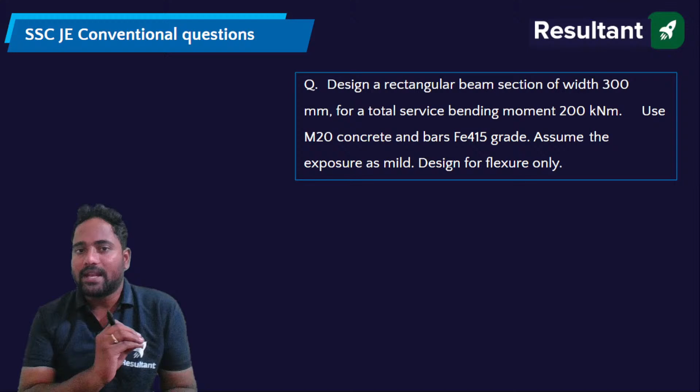The first question is: design a rectangular beam section of width 300 mm for a total service bending moment of 200 kilonewton meter, using M20 concrete, Fe415 steel. Assume the exposure as mild. Design for flexure only - flexure means you are going to design only for flexural reinforcement, you will not be designing anything for shear reinforcement here. So what is the width of the beam given to you? Width of the beam given to you is 300 mm.

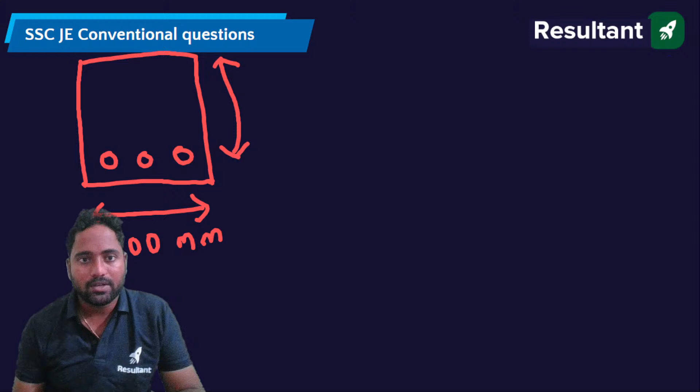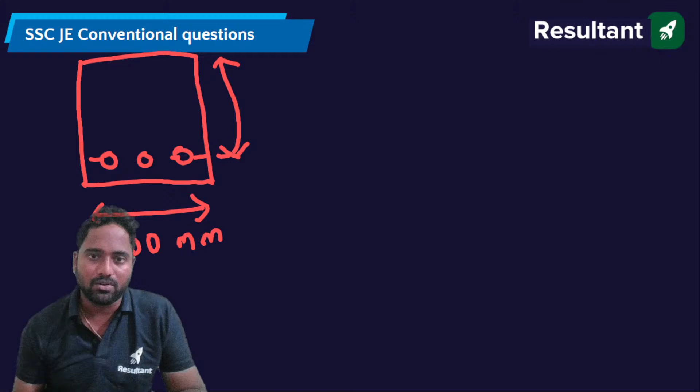Width of the beam is given to you as 300 mm. You have to design, meaning you have to find out what is the effective depth and what is the steel reinforcement. Is it given which type of beam is given to you? Design a rectangular beam of section 300 mm width for a total service bending moment of 200 kilonewton meter, using M20 concrete and Fe415 steel. Assume exposure as mild condition. Design for flexure only.

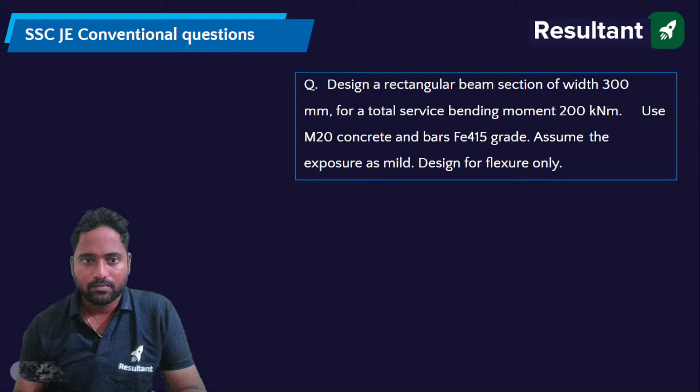Just a minute, guys.

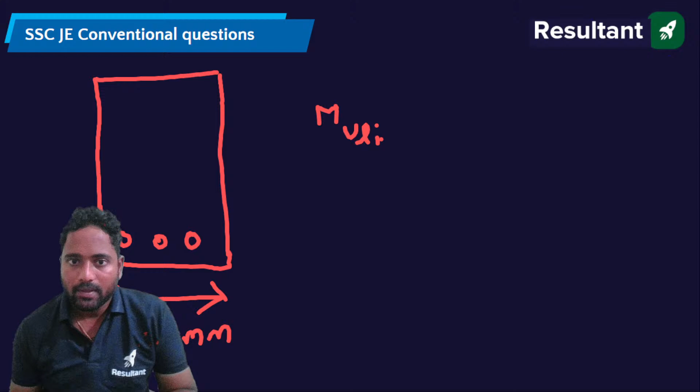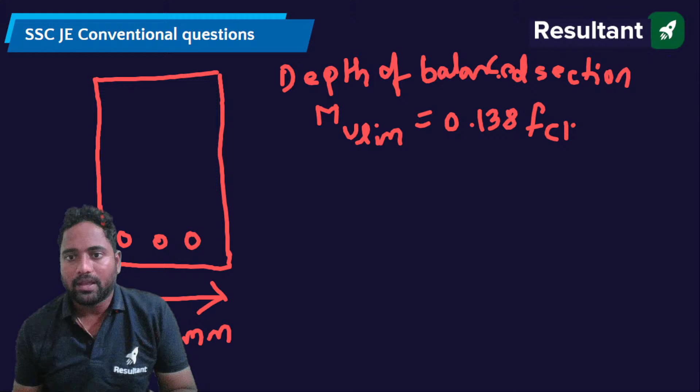Width of the beam is 300 mm. The idea is to first find out the depth of the beam. So Mu limiting - that means for depth of balanced section, or I can also call this the limiting section - Mu limiting would be equal to 0.138 FCK BD square.

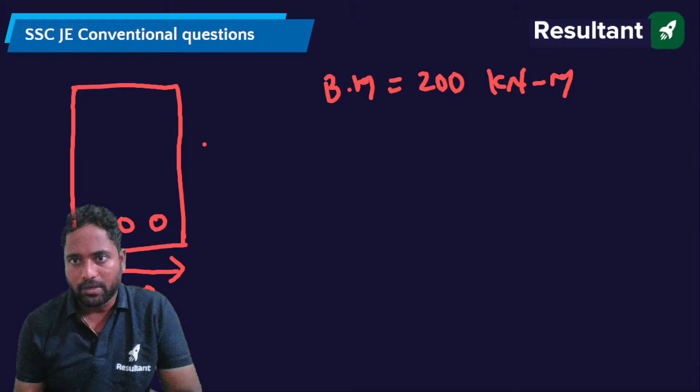Given bending moment is 200 kilonewton meter. So what will be the factored bending moment? Factored bending moment would be equal to 1.5 times 200, that would be equal to 300 kilonewton meter. This is your factored bending moment, which you can also take as Mu limiting. Mu limiting I'll take as 300 kilonewton meter.

So if this is 300 kilonewton meter, then depth of balanced section - how we will calculate it - Mu limiting equals 0.138 FCK BD square. So here, what is the grade of concrete given to you?

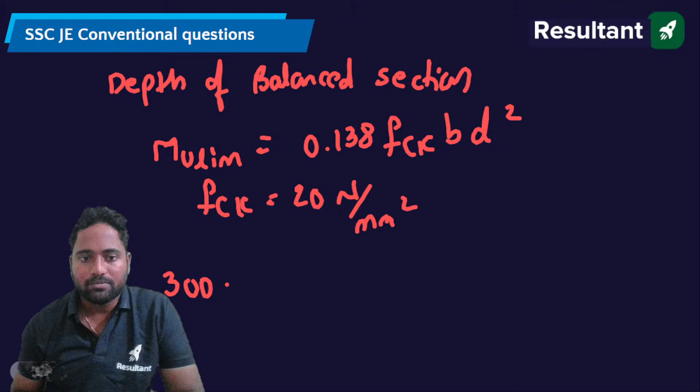Grade of concrete given is M20 concrete with Fe415 steel. So FCK would be equal to 20 Newton per mm square. For 300 kilonewton meter, in terms of Newton mm that is 300 into 10 to the power of 6, equals to 0.138. FCK is 20 and B is 300 mm multiplied by D square.

From this, if you substitute, what you will get is D. D, as AJ said, you will get it as 601.92 mm. Exposure condition is mild exposure condition.

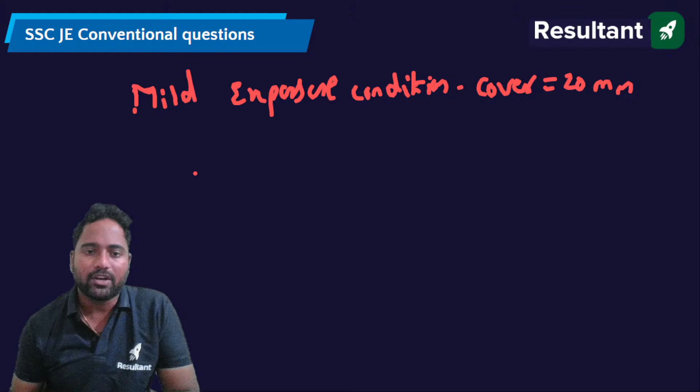Generally for mild exposure condition, you will provide 20 mm cover, but I'll provide effective cover as 50 mm, since D required is 601.92 mm.

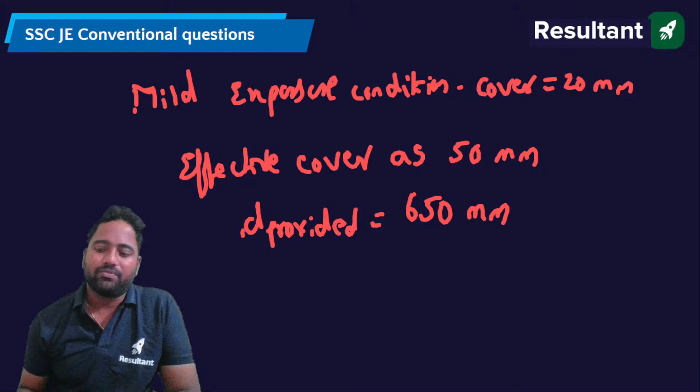I'll provide D as 650 mm. This is a design type of question, so D provided can be anything nearby - you could provide 600 mm, but I'm providing 650 mm.

Overall depth would be equal to D provided plus effective cover, that is 650 plus 50, equals to 700 mm. So overall depth would be equal to 700 mm, and effective depth would be equal to 650 mm.

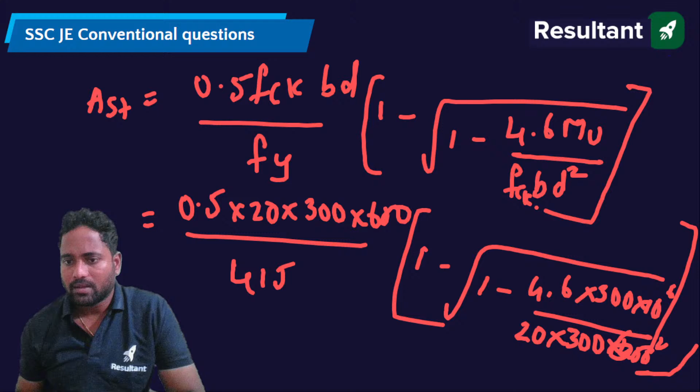Substitute everything in Newton per mm, Newton mm and Newton per mm square. When I'm multiplying mu by 10 to the power of 6, it's because it's given in kilonewton meter, and I'm trying to convert that into Newton mm. That's the meaning over there. So finally, what is the value of AST that you will get?

Please do substitute and let me know the AST value. Arvind is saying it is 1644 mm square.

So approximately what I can provide? If I take 20 mm dia bars, number of 20 mm dia bars would be equal to AST upon pi by 4 into 20 square. AST is 1644 upon pi by 4 multiplied by 20 square.

So how many number of bars? AJ, how many number of bars? How many number of 20 mm dia bars? He's saying approximately 6, something around 5.1 you are getting. What is the value that you are getting? 6 bars. Fine, so you are getting 6 numbers of 20 mm dia bars.

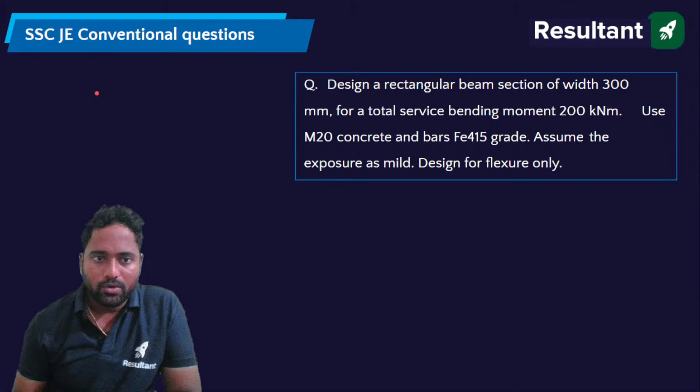So here you are getting overall depth as approximately 6, I mean 700 mm, and AST equals to 6 numbers of 20 mm dia bars.

What is AST minimum? AST minimum would be 0.85 upon Fy multiplied by B into D. What is the value of AST minimum? Please give me the answer.

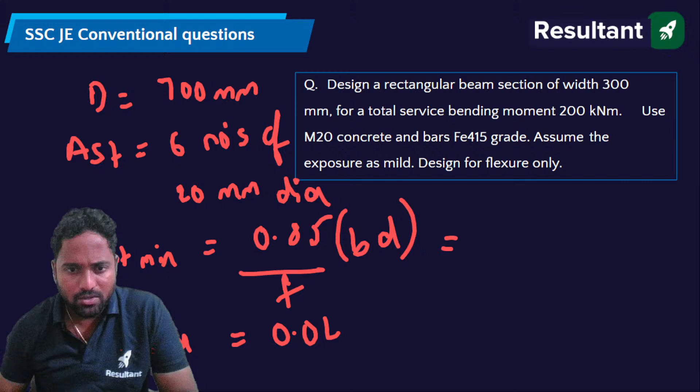When I am saying small d, it means 650 mm. Capital D, overall depth, is 700 mm. What is the value of AST minimum? And similarly, what would be AST max? AST max, what is the formula? 0.04 B into D. So what is the value of AST max and what is the value of AST minimum?

AST minimum you are getting 400 mm square. AST max, you can use calculator over here. These are conventional questions, you are supposed to use calculator. Without that, you can't solve these questions. I am discussing conventional questions over here. This is not for RRB JE, this is not for objective questions. This class is exclusively for conventional questions.

AST max is 8400 mm square. So whatever AST you got, it is in between AST minimum and AST maximum. Therefore, our design is safe.

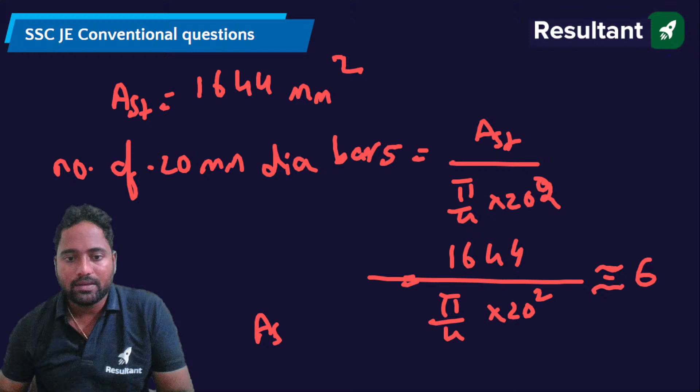So AST provided, whatever the AST provided. Right? So this is how you calculate. AST provided is in between AST minimum and AST maximum. So from this you can clearly say that our design is safe.

So whenever they ask you to find out what is the beam section width, and when a bending moment is given to you, the very first thing is we always try to design it as limiting section, because we don't know whether it is over reinforced or under reinforced. So the better thing to do is we'll try to provide it as limiting section, and you can check it.

So based on this, what you can say is, what is the limiting depth? If you want to calculate limiting depth, first you calculate Mu limiting. From Mu limiting, 0.138, here it is based on limit state method. This is not WSM, this is limit state method. So Mu limiting would be equals to 0.138 FCK BD square. From that you got D as 601.92 mm.

So you'll provide D as 650 mm. You can provide 600, but since to provide more, I'll provide 650. 625 also you can provide as 650. I am providing mild exposure condition. For mild exposure condition, cover should be 20 mm. So I am providing effective cover as 50 mm. So overall depth is 700 mm.

So once you find out overall depth, now how you are going to find out AST required? AST required would be equals to 0.5 FCK BD upon Fy, 1 minus square root of 1 minus 4.6 MU upon FCK BD square. This is for under reinforced section. Obviously, if you are providing more depth, it means indirectly we are designing it as under reinforced section.

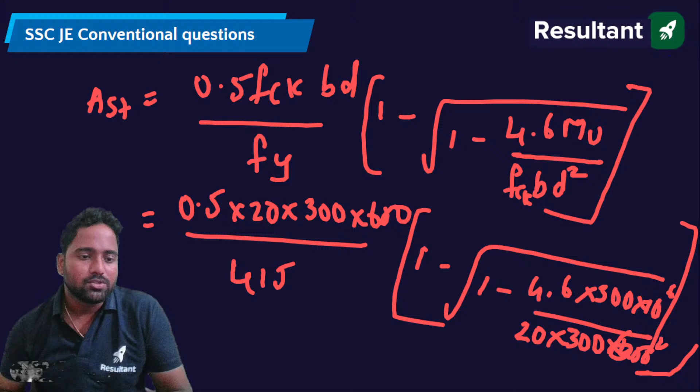So AST we calculated, we got somewhere around 6 numbers of 20 mm dia bars, and we have to check whether it is in between AST minimum and AST maximum or not. AST minimum formula is 0.85 upon FY multiplied by B into D, and AST maximum would be 0.04 times B into capital D. So AST provided should be in this range, then only your design is correct.

Fine. Any doubts in this, guys? Please do comment. If not, we'll go to the next question. Any doubts in this? Sir, by discussing conventional questions, I am discussing the concept also over here.

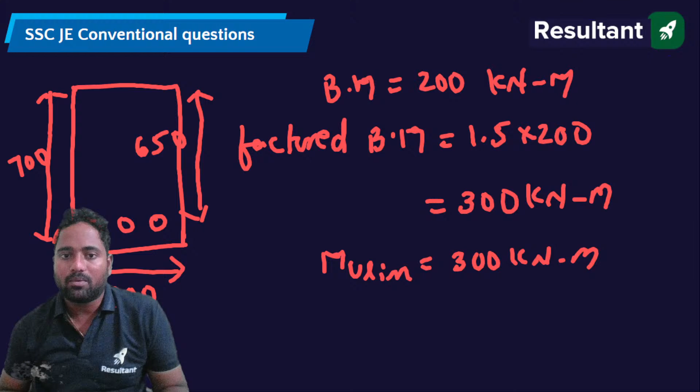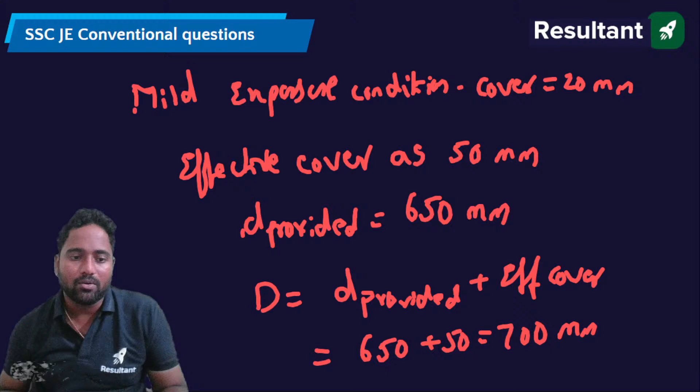Here, this is one question where they'll ask what is the AST minimum, and this is another question, what is the AST maximum. And sometimes in the question in the GATE also they'll ask what is the factored bending moment, given bending moment, and what is factored bending moment they'll ask. And they'll ask how you are going to find out the depth. Mu limiting equals to 0.138 FCK BD square. From that, how you are going to find out depth required, and overall depth, how you are going to find out. So all these things is discussed in one single question.

Fine. Now going to the next question: find the moment of resistance of the beam section of 20 centimeters by 60 centimeters deep. If it is reinforced with two 20 mm dia bars in compression and tension, each at an effective cover of 50 mm, use M25 mix and Fe415 grade steel. Stress in the compression steel, you can take it as 354 Newton per mm square.

Try to solve this, Arvind. Find the moment of resistance of beam section of 20 centimeters by 60 centimeters deep, overall depth, or you can take that as effective depth. If it is reinforced with two 20 mm dia bars in compression and tension, each at an effective cover. Effective cover is also given to you.

Use M25 mix and Fe415 steel. FSC, you can take it as 354 Newton per mm square.

Sometimes charts will be given to you. If charts are not given, they will directly give you the value of FSC. If you don't remember, generally it is in the range of 354, or it depends upon D by D ratio. But approximately 350 also you can take. Here, in this case, 354 Newton per mm square is what you generally take as FSC. So please try to solve it.

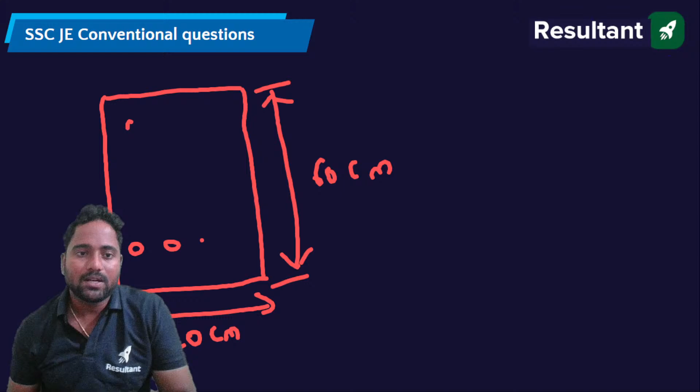20 centimeters by 60 centimeters. If I have to erase, I have to erase overall. One second, I will draw.

two 20 mm dia bars on both compression and tension side.

I think Ajay is trying to solve the question.

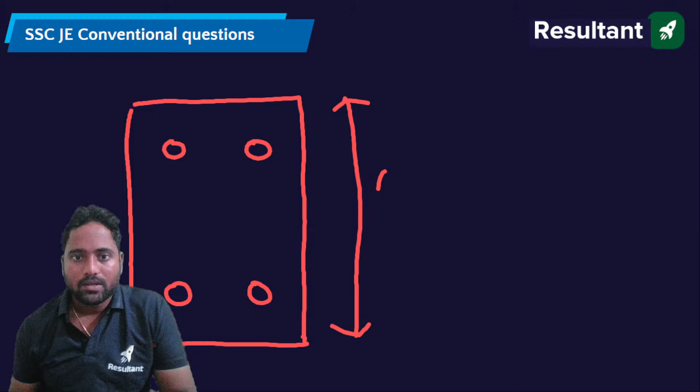60 centimeters means 600 mm, not meters, 600 mm, and this would be 200 mm. Effective cover on both sides is 50 mm, and effective cover over here also is 50 mm.

And always remember, you will get some marks if you attempt. It's not like a college exam where you write some nonsense stories and get marks. No, it doesn't work that way. If you attempt the question, then definitely you'll get some marks.

So overall D equals 600 mm. Some people will take 600 mm as effective depth and provide 50 mm effective cover separately. That is also sometimes correct, but if you want full marks, effective depth would be 600 minus 50, so effective depth equals 550 mm.

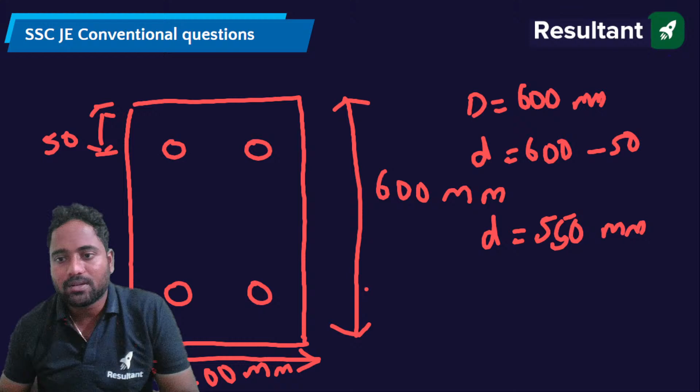AST and ASC, both are two 20 mm dia bars, right? So we are discussing only flexure over here. We are not discussing any shear design.

Ajay Rajput, how are you? So Rajput, you're from Rajasthan? Rajasthan, Jaipur.

So D equals 550 mm, effective depth is 550 mm. Now just try to calculate what is AST. AST would be equal to 2 multiplied by pi by 4 into D square, that is 20 square. That is same, ASC is also same. ASC is also 2 multiplied by pi by 4 multiplied by 20 square. This is AST and ASC, both are same. First your idea should be how you are going to find out whether this is under-reinforced, over-reinforced, or a limiting section.

For that, first you have to find out what is XU limiting. XU limiting would be equal to, if it is FE 415, we can simply take it as 0.48D. XU limiting equals 0.48D, so that is 0.48 multiplied by effective depth 550 mm. What is this value, XU limiting? 0.48 multiplied by 550.

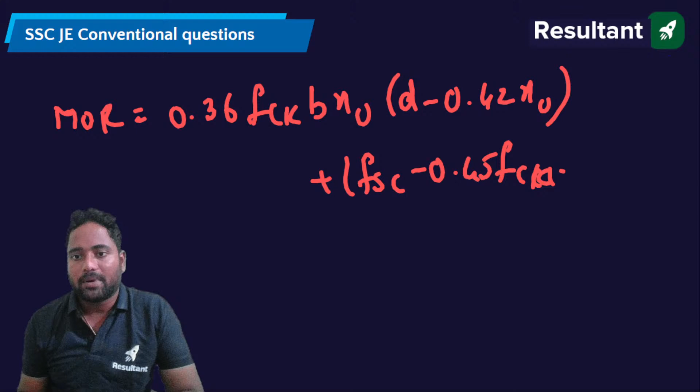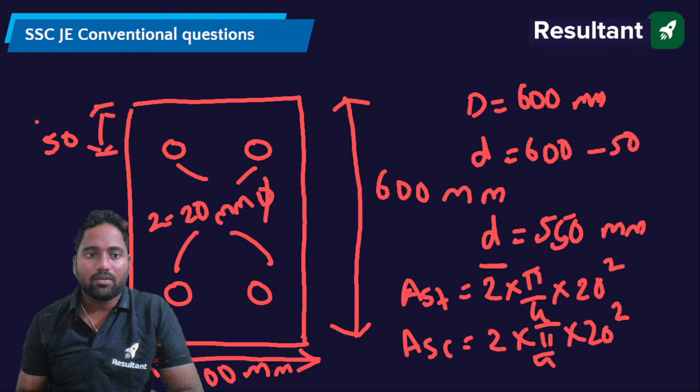plus FSC minus 0.45 FCK multiplied by D minus D dash. D dash is the effective cover of compression reinforcement. Effective cover of compression reinforcement - this is D dash - is also 50 mm.

So if you try to substitute it over here, XU is less than XU limiting, so here it is under reinforced section. This is 0.36 FCK B into XU. 0.36 FCK is 25, B is 200. XU you got 6.59 mm, and D you are taking as 550, minus 0.42 multiplied by 6.59, plus FSC is 354, minus 0.45 multiplied by - sorry, not 215, it is multiplied by FCK, which is 25.

And here there is ASC also. Sorry, here there is ASC. ASC is 628 multiplied with D, which is 550 minus 50. Substitute it, you know all the values.

0.36 FCK B into XU multiplied by D minus 0.42 XU. You are not substituting XU limiting here, you are just substituting XU over here. 0.36 FCK B into XU, D minus 0.42 XU, plus FSC minus 0.45 FCK multiplied by ASC multiplied by D minus D dash. I am solving this based on limit state method.

If nothing is mentioned in the question, you solve it using limit state method. If they want you to solve by WSM, working stress method, they'll mention it explicitly. If not, you have to solve it by limit state method.

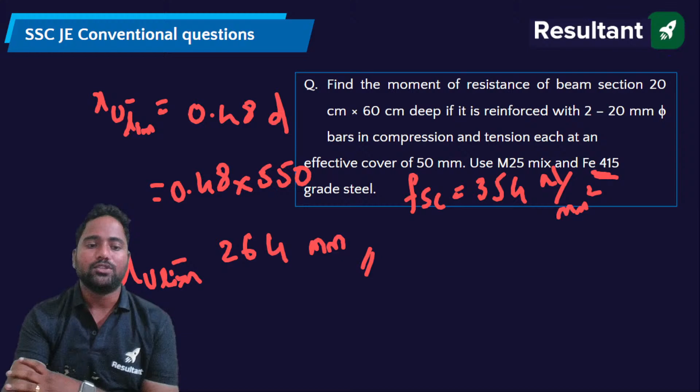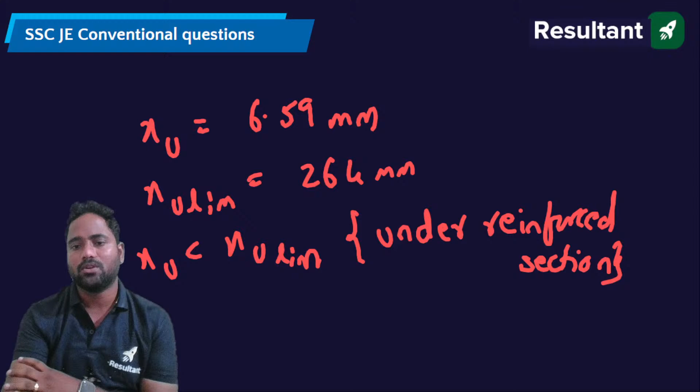So what we have done is calculate XU limiting and XU, and checked whether XU is less than or more than XU limiting. Based on that we determine whether it's an under reinforced, balanced, or over reinforced section. For under reinforced sections, XU limiting for Fe 415 is calculated as 0.48D, and XU is calculated using C equals T. Since XU is less than XU limiting, it is an under reinforced section, and based on that we calculated the moment of resistance. Any doubts?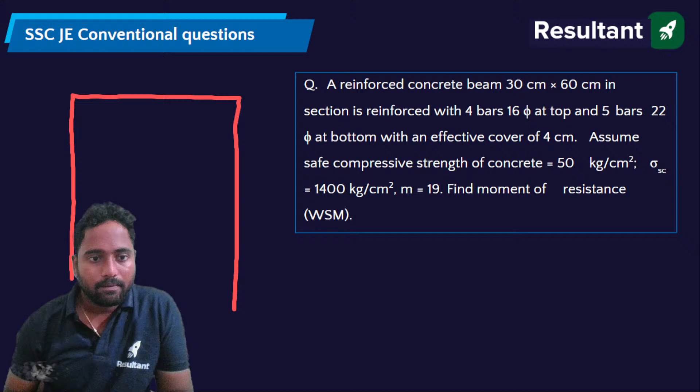The beam dimensions given to you is 30 centimeters by 60 centimeters, that means 300 mm by 600 mm.

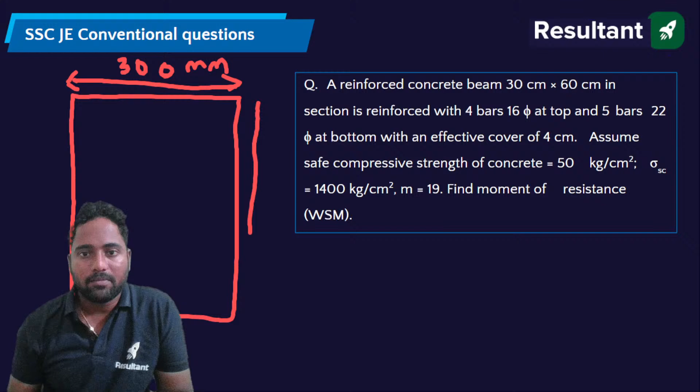The effective cover given to you is 40 mm, and it's reinforced with 4 bars of 16 mm dia, 1 2 3 4, in the compression zone, and 5 bars of 22 mm dia at the tension zone.

So ASC equals 4 multiplied by pi by 4 multiplied by 16 square, and AST equals 5 multiplied by pi by 4 multiplied by 22 square, for the 22 mm dia bars. So we can find out ASC and AST values. Sigma CBC is 50 kgs per centimeter square and sigma SC is 1400 kgs per centimeter square. Try to convert that into Newton per mm square as well.

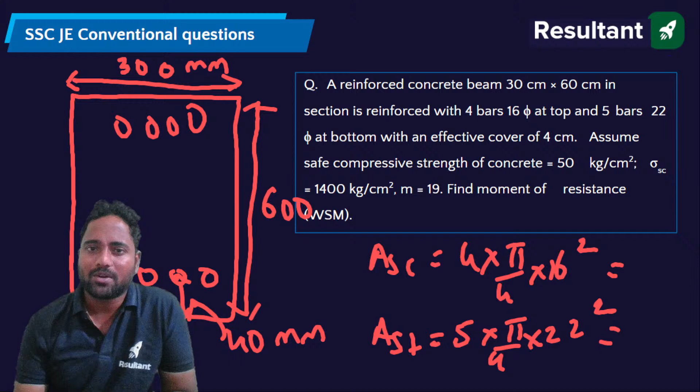You have to convert, you don't have a choice. Approximately, you can take sigma CBC as 5 Newton per mm square, and sigma SC as 140 Newton per mm square, approximately, don't you think so? Because 1 kg is about 10 newtons, and if you convert centimeter square into mm square, that would equal 100 mm square.

Try to solve it, guys.

Fine, I'll solve this with you accordingly, parallelly - both of us will solve it. Just let me know what is the value of ASC and AST, and what else is given to you over here.

Safe compressive strength, that is sigma CBC, equals 50 kgs per centimeter square. Approximately, taking 1 kg as 10 newtons and centimeter square as 100 mm square, this is approximately 5 Newton per mm square. If you take it as 9.8, you'll get somewhere around 4.9, but anyway, approximately I'm taking it over here. Sigma ST equals 1400 kgs per centimeter square.

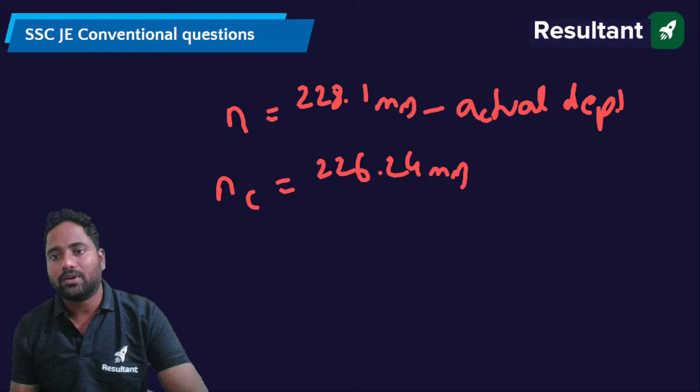So actual depth, n is called actual depth of neutral axis. And NC is called critical depth of neutral axis. Since n is greater than nc, this is an over reinforced section. N is greater than nc, this is called over reinforced section.

So since it is over reinforced section, our idea is to calculate moment of resistance. So how will you calculate moment of resistance, guys? Let me know how will you calculate moment of resistance.

See, over reinforced section means first concrete fails, then steel fails. Right? First concrete fails, then steel fails. So here, since it is doubly reinforced section,

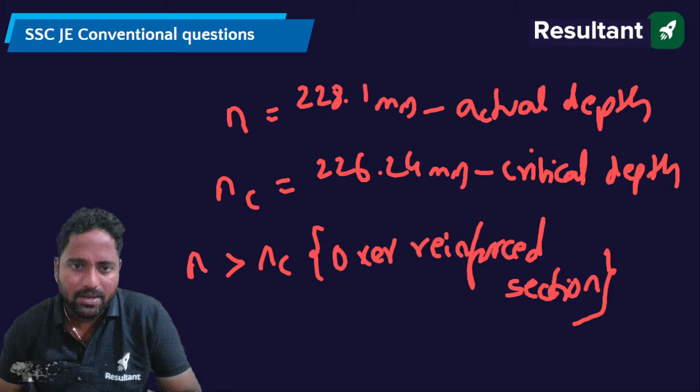you have to calculate what is the stress at the level of compression steel, that is generally taken as C dash. So the stress strain diagram or stress diagram would be simply a rectangular figure. In WSM, it is simply taken as a rectangular figure, something like this. Not rectangular, triangular, I mean to say that it is a straight line. So simply it would be a straight line, something like this.

It would be a straight line. So this is the actual depth of neutral axis, I'll take this as N. Here the stress is C, sigma CBC or C, that I am taking it as 5 Newton per mm square.

Now at the depth of compression steel, you must be able to calculate the stress, that is C dash. This depth is D dash, I'll write it as D dash. So how are you going to find out? You can write C by N equals C dash upon N minus D dash.

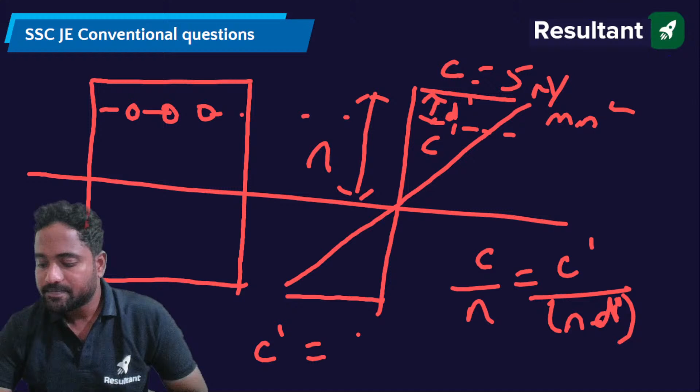What is the value of C dash? Please let me know the value of C dash, guys. Not MOR, what is the value of C dash?

FSC or C dash over here is equals to 4.04 Newton per mm square. So C dash is 4.04 Newton per mm square. And finally...

Moment of resistance would be equals to B multiplied by N multiplied by C by 2 multiplied by D minus N by 3, plus 1.5 M minus 1 multiplied by ASC multiplied by D minus D dash, multiplied by ASC. What is the doubt? ASC multiplied by C dash multiplied by D minus D dash.

So B is 300, N is 228 something, C is 5, by 2 multiplied by D is 550 minus 228 by 3, plus 1.5 multiplied by 19 minus 1 multiplied by ASC. ASC is 804.2 multiplied by D is 550 - sorry, 560, not 550, this is 560, right? 560 minus 40, 560 minus 40.

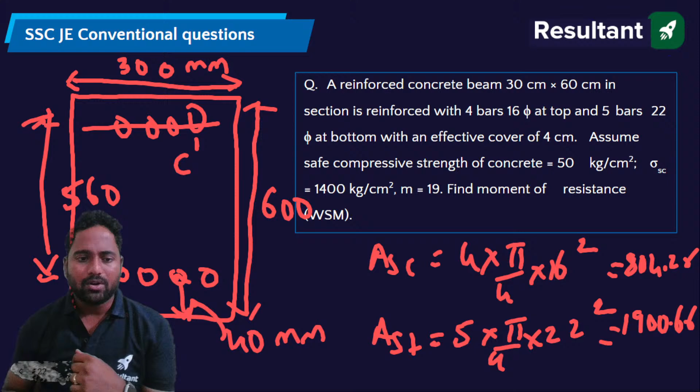CBC is given to you and sigma ST is given to you, M value, moment of resistance he has asked. The idea is to calculate the critical depth of neutral axis, which would be M upon M plus R multiplied by D. From that you will get the critical depth of neutral axis, and you got somewhere around 226. I have deleted that, so please don't mind.

Next one is to find out what is the value of actual depth of neutral axis. You just equate C equals to T and try to find out the actual depth of neutral axis. So here actual depth is 228.1, critical depth you got is 226.24 mm. Actual depth is more than critical depth, so this is an over-reinforced section.

Over-reinforced section. So what we have calculated is, initially we calculated C as 5 Newton per mm square, and what is the value of C dash? Since it is an over-reinforced section, first failure is in the concrete, so C you can easily take as 5 Newton per mm square, so I am taking it as 5 Newton per mm square. If not, if it is an under-reinforced section, you should be taking sigma ST, right?

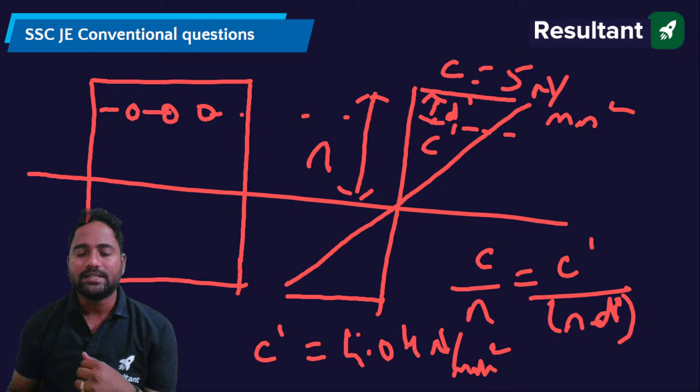From that, based on that, you have to calculate C, but since it is an over-reinforced section, first failure is in the concrete, so C you'll take as 5 Newton per mm square. First failure means concrete reaches maximum first, then steel. C dash I have calculated from 4.04 Newton per mm square. From that, moment of resistance equals B into N into C by 2, D minus N by 3. I'm not giving you the proof, you have to remember this. Plus 1.5, M minus 1, ASC into C dash, not C, multiplied by D minus D dash: 300 into 228 multiplied by 5 by 2, 500 minus 228 by 3, 1.5 - if you substitute, you get 126.67 kilonewton.

Any doubts in this, let me know, I'll repeat if needed. It takes some time, there will be quadratic equations - use your calculator to get the answers. This takes time, but if you solve this, you'll get marks. Conventional questions are like this.

Any doubts in this, guys? Please let me know. Any doubts? Any doubts?

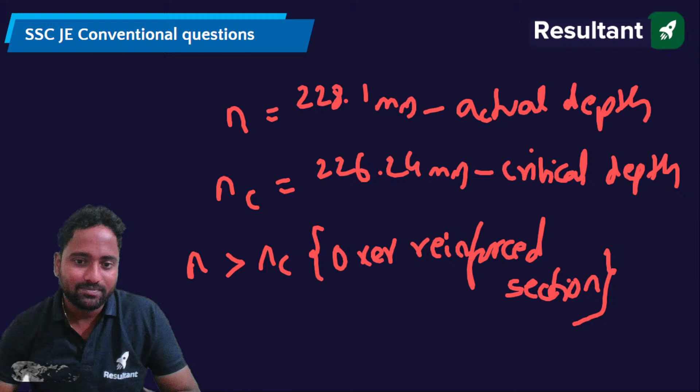We do analysis in SOM, and in RCC we design. Simple answer.

Arunachal Entertainment - what type is that? Where are you from? You're from Arunachal Pradesh. Different names here, Arunachal Entertainment.

You're from Arunachal Pradesh, huh? Far, very far from my place. I've never been to Arunachal Pradesh, but one day I'll definitely go there.

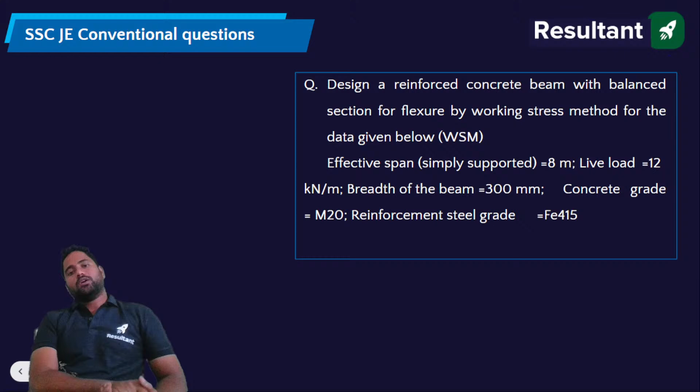Design means you have to calculate the depth and you have to calculate the steel - two things you have to calculate. In the limit state method, bending moment is given to you directly, but here you have to calculate the bending moment yourself, so the SOM concepts come into the picture.

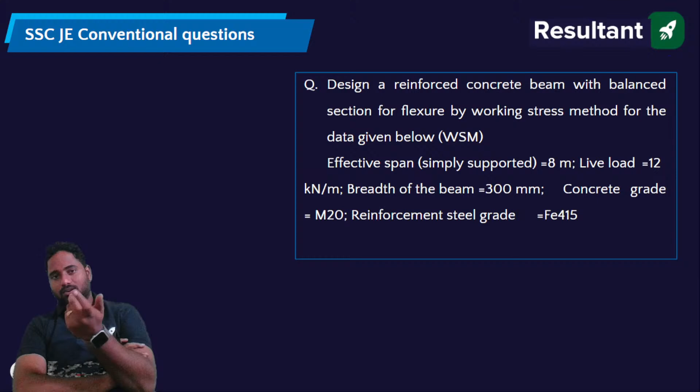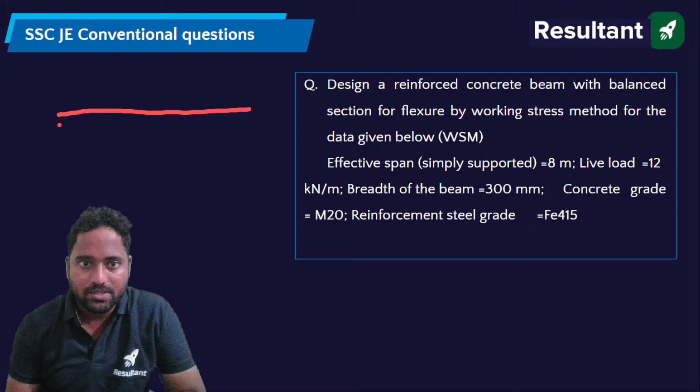Effective span: L effective is given to you as 8 meters. And there is live load as well as dead load, but while live load is given to you, dead load you have to calculate.

So the first thing is: if the concrete grade is M20, what is the value of sigma CBC? Please give me the answer. And grade of steel is Fe415 - what is the value of sigma ST? I'm trying to solve this with you, please try to solve along with me. M20 grade concrete is given - what is the value of sigma CBC? Please tell me. And for Fe415, what is the value of sigma ST?

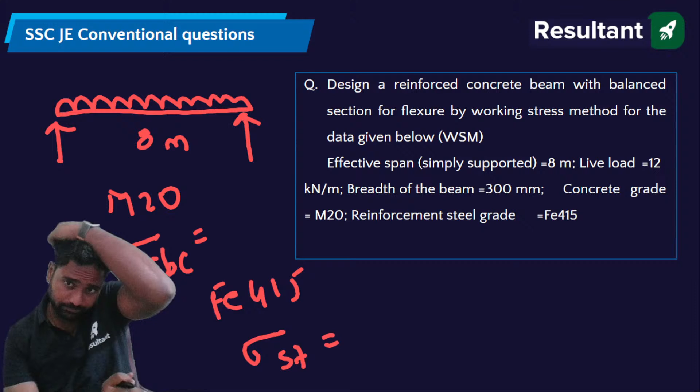What is sigma CBC and what is sigma ST?

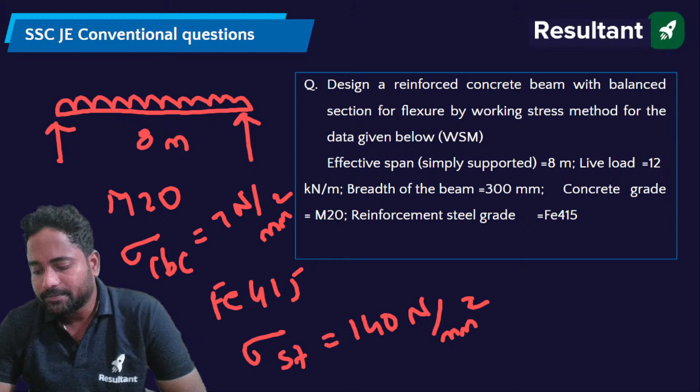What is the value of Fv? For Fe415, what is the value of sigma ST, guys? 140 Newton per mm square. For Fe415 what is the value of sigma ST? Sigma ST, what is the value? No comments. Sigma ST, is it 140 Newton per mm square?

If you say it is 140, I'll go with 140. If you want me to change, let me know. Sigma CBC is 7. Sigma ST, what is the value of stress in the steel?

Stress in the steel. This is Fe415. What is the value of stress in the steel?

Because Arunachal has said 140 and he has given a question mark. Are you sure it is 140 or what is the value? Let me know. What is the value of stress in the steel?

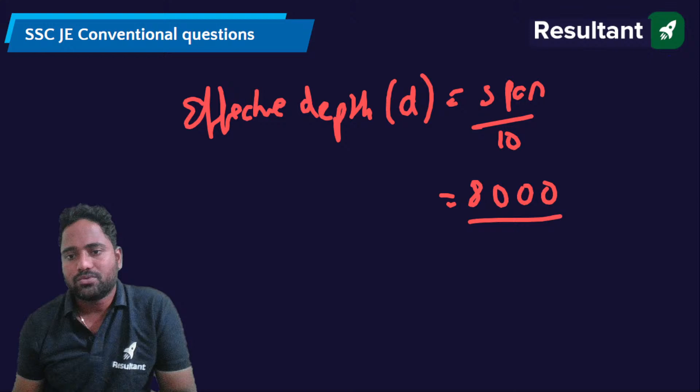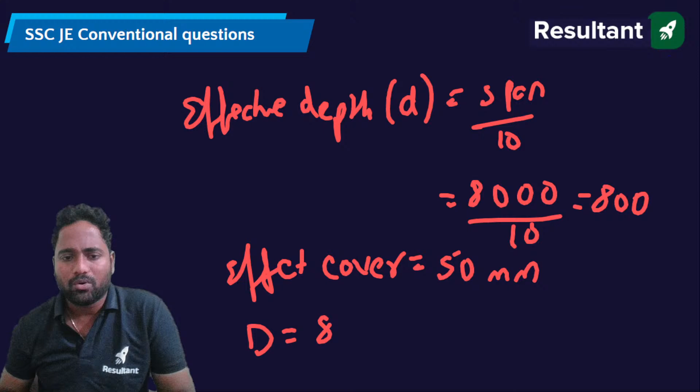Because in many cases you will find it difficult. That is equal to span upon 10, so that is 8000 upon 10, that equals 800 mm. And we will provide an effective cover. Assuming mild, since nothing is mentioned, you can provide 50 mm. So overall depth would be equal to 800 plus 50, that equals 850 mm.

850 mm, right? So d equals to 800 plus 50, that is 850 mm. This is just an assumption, right? Whether this is correct or not, you should check it.

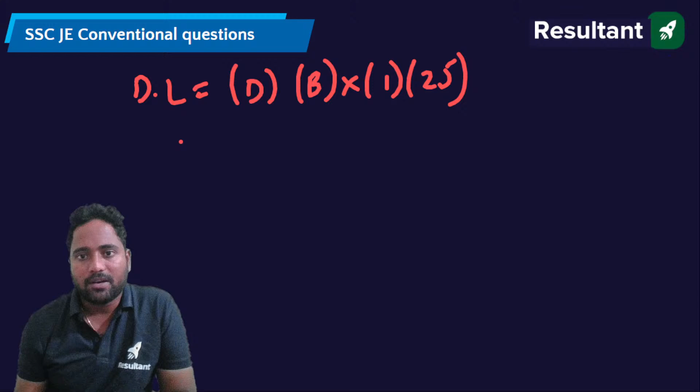Now what is the bending moment? Effective. Now what is the dead load? If you have to calculate what is overall depth, overall depth is 850 mm, you can take it as 0.85. Dead load would be equals to d multiplied by b multiplied by 1 meter length multiplied by density. Depth is 0.85 multiplied by width, width is 0.3, 300 mm, multiplied by 1 multiplied by 25, that equals to 6.375 kilonewton per meter. He has given 6.375 kilonewton per meter.

And live load is given to us, 12 kilonewton per meter. Overall load would be equals to live load plus dead load. I'll write it as WL, that equals to 12 plus 6.375, that equals to 18.375.

Now what is the bending moment? Bending moment would be equals to WL square upon 8. This is for a uniformly distributed load on a simply supported beam, bending moment is equals to WL square upon 8. W would be 18.375, L is 8, square upon 8. What is the bending moment you are getting? Bending moment you are getting is 147 kilonewton meter.

But we have to design it over here, assuming that as what he is saying, balanced section by using WSM method. So in WSM method, bending moment would be equals to, you can simply write QBD square, right? So whereas bending moment here, you will be getting 147 into 10 to the power of 6.

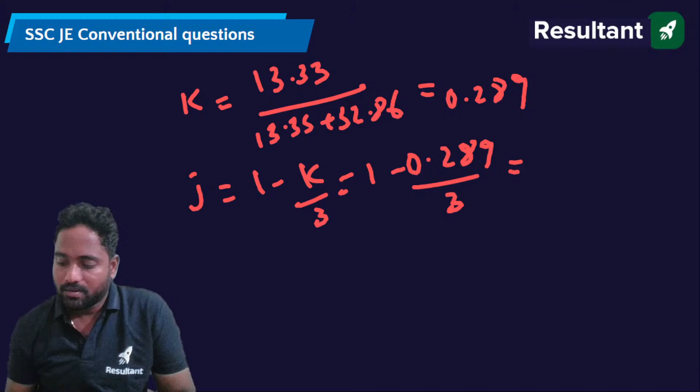J value you are getting it as 0.91. Now finally, bending moment, that is 147 multiplied by 10 to the power of 6 equals to half into 0.289 multiplied by 0.91 multiplied by 7 multiplied by b is 300, multiplied by d square. From this, what is the value of d you're getting? Please give me what is the value of d you're getting.

What is the value of depth you're getting, guys? Depth you're getting somewhere around 733.65 mm, which is less than 800 mm, that is what we have provided. So our design is safe.

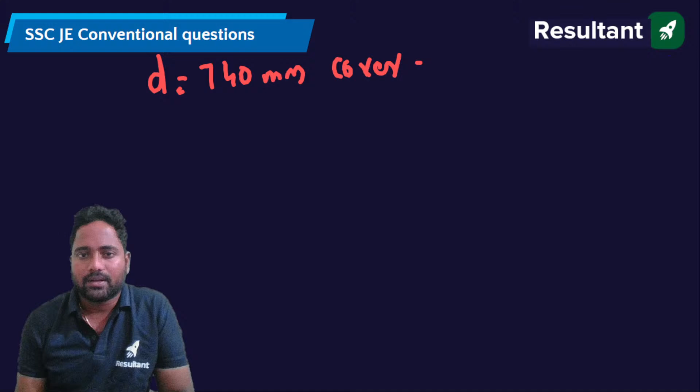Design is safe, so you can provide approximately 740 mm now. So D value that can be provided is 740 mm, and effective cover is 50 mm. Overall depth would be equal to 790 mm.

Now the idea is to find out what steel we need. We have calculated depth, now the idea is to find out the steel. So simply by equating compressive force equals tension force, you can easily find that out.

So B multiplied by K into D multiplied by half sigma CBC. That would be equal to tensile strength. Tensile strength is simply sigma ST multiplied by AST.

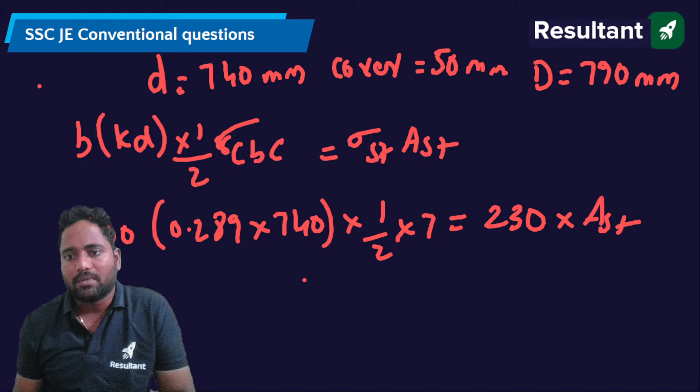So B value is how much? You can write this as 300 multiplied by K. K is 0.289 multiplied by 740 multiplied by half multiplied by 7, and sigma ST is 230 multiplied by AST. What is the value of AST?

What is the value of AST from here? AST equals to how much you are getting? 976.31 mm square. This is AST.

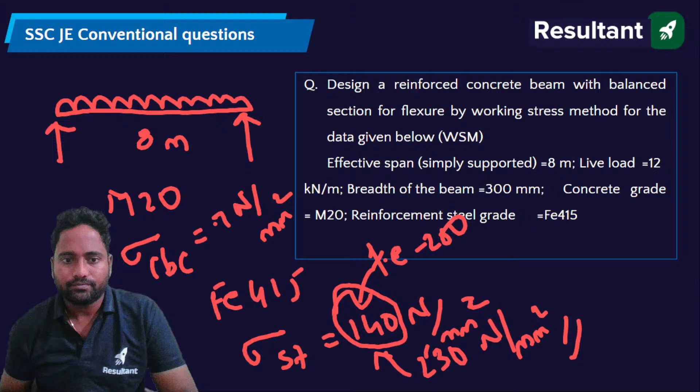So what is the number of 16 mm dia bars? Just give me the number. Find number of 16 mm dia bars: AST upon pi by 4 multiplied by 16 square.

So number of 16 mm dia bars, guys, what is the value of AST? Please let me know the number of 16 mm dia bars. 5 bars, fine, 5 bars. So you'll provide a depth of 790 mm, meaning 800 mm. You can provide an AST of 5, 16 mm dia bars.

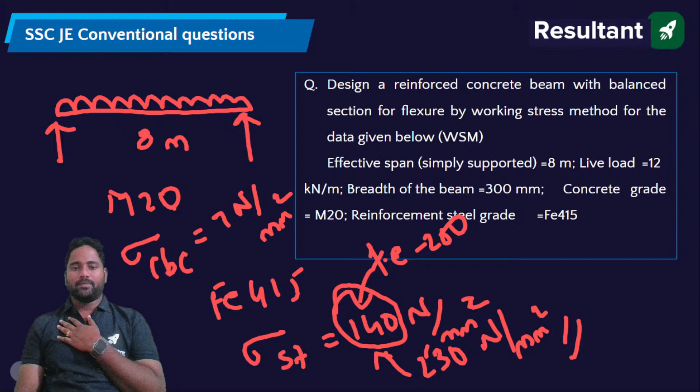That is the design. So finally, what you have to do is just draw a figure showing all these things, 6 bars. I'll draw it here.

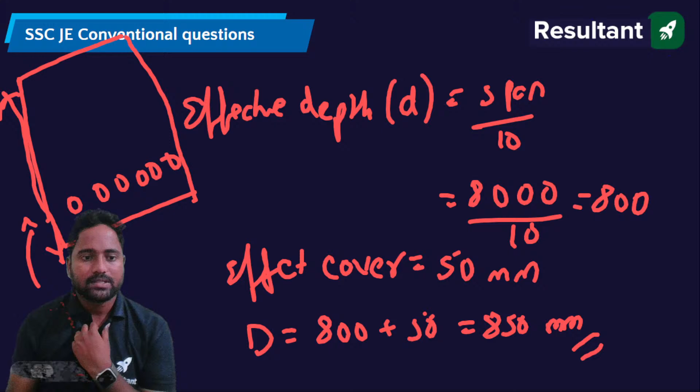6, 3, 4, 5, 6, and overall depth we are providing as 790 mm. Overall depth is 790 mm and effective depth is 740 mm, and this is 6 numbers of 16 mm dia bars.

5 bars, you said 6, now you are saying 5. Please do the calculation correctly, man. I'm believing you and you are doing these things. Sorry, he's saying 5. 5 bars of 4 point something, if you are getting, then it is 5 bars.

I don't have the answers with me, I'm just believing you blindly. Please do it once again and tell me the answer. 5 bars of 16 mm dia bar, 5 bars of 16 mm dia bars.

Please don't make calculation mistakes here. After working hard for these many months and doing everything, at the end don't make calculation mistakes. The final answer, they'll see if you have drawn a diagram where it's 790 mm or approximately 800, with a range of 750 to 850, they'll see that, and if the figure is correct, they won't check everything, they'll just give you marks. Believe me, the final figure that you have drawn, if it is correct, they'll give you full marks. If there is anything wrong, or if you haven't drawn the figure, then you will get less marks. So try to draw the figure at the end.

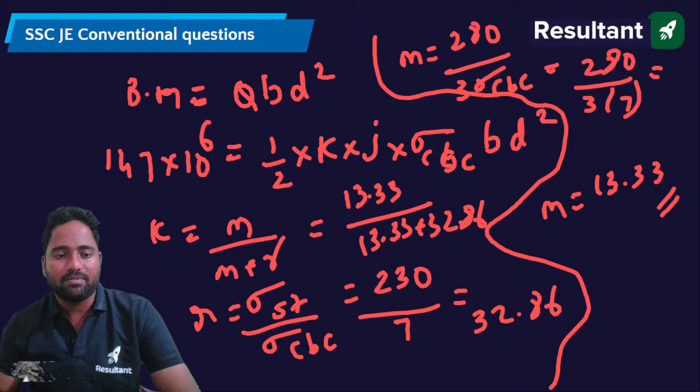From this, I have calculated depth. Depth I got 740 mm, which is less than assumed, therefore it is safe. So for 740 mm you will provide a cover of 50 mm, so D would be 790 mm only.

And from that, AST I have calculated. AST, as you said, it is 5 numbers of bars. So 5 bars of this much mm. So 5 bars of 16 mm dia I have got.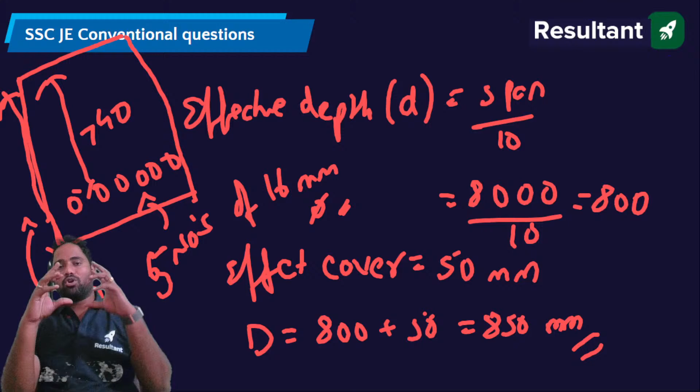Always remember, please draw the figure at the end. If the figure is correct, if they are asking you to design and the figure is approximately correct, they will give you full marks. They won't check the whole process, because they understand you know the concept once you have drawn the figure. So the figure helps you at the end.

You have to just note it down like 300 mm, 740 mm, 790 mm, 5 numbers of 16 mm dia. Sometimes your assumptions change and many things change, but it should be in the range. Like if he provides a question of 800 to 900, or 750 to 850, or 4 to 6 numbers of 16 mm dia bars. If it is in the range, he'll simply tick it and give you full marks.

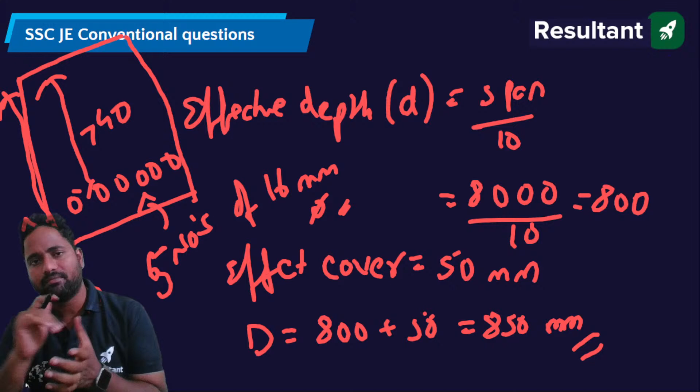So how to design beam in both LSM and WSM, how to find out moment of resistance in both WSM and LSM, the concepts are also covered over here. We are not wasting time. I know that your time is precious and I'm not wasting your time at all.

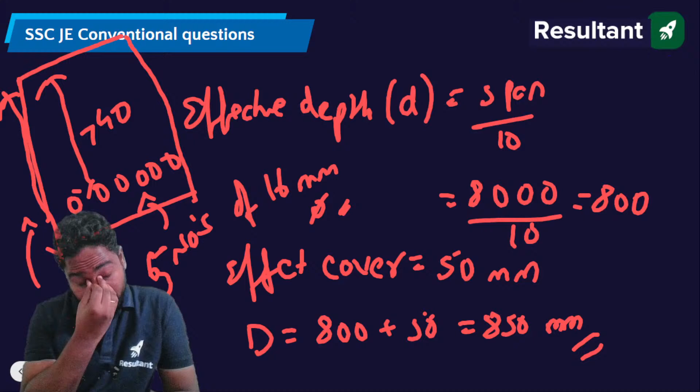Please let me know, guys. And is this timing okay for you? You want me to change it to morning 6 to 8? 6 is too early, because there are certain people who might read in the mornings also, and certain people who read in the nights. It depends whether you are a night owl or an early rooster.

Any doubts, guys? Any doubts? WSM based on stress, LSM based on strain? No, both WSM and LSM are based on stress-strain curves. It's not like WSM is based on stress and LSM is based on strain. In both cases, the strain diagrams will be linear, whereas the stress diagram would be different. That's it.

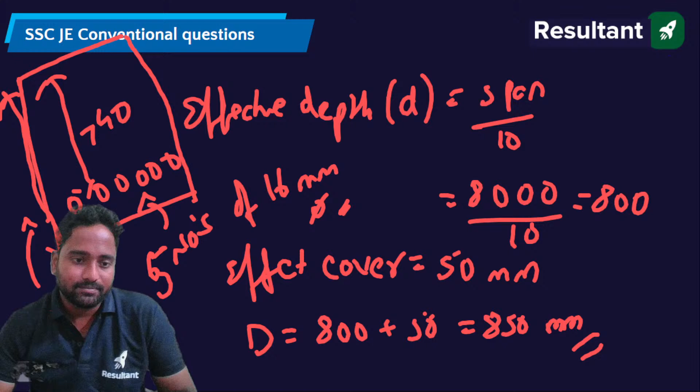If you're taking any beam for a case, the strain diagram in WSM, if this is the strain diagram, the stress diagram will also be like this only. This is the level of steel. If this is strain diagram, this is stress. Stress and strain are linearly proportional. This is in WSM.

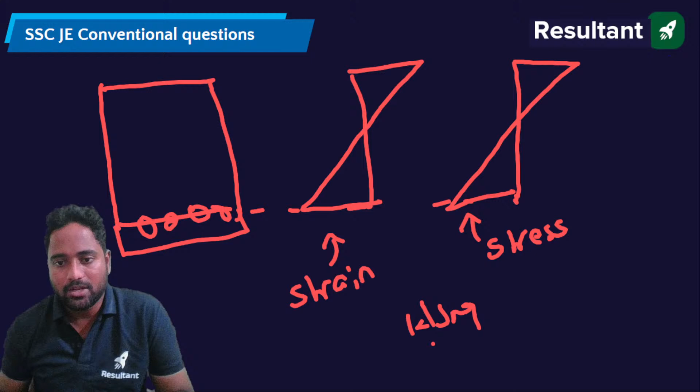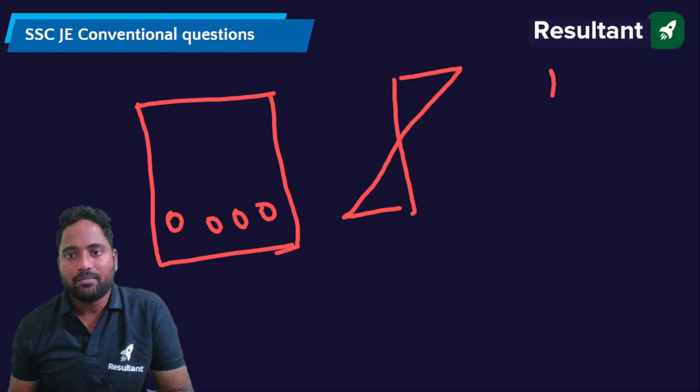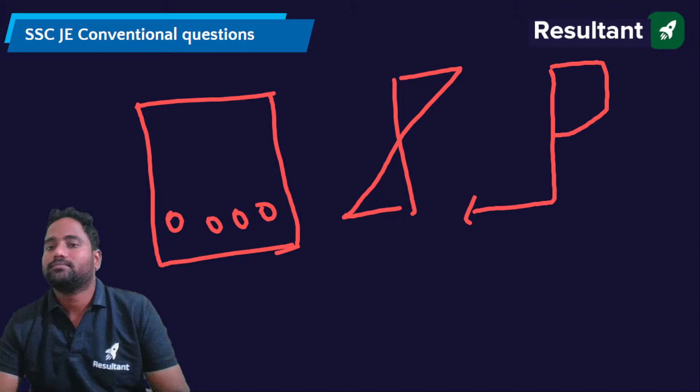Whereas in LSM, the strain diagram will be linear, whereas the stress diagram will be different. It would be something like this. So you can't simply say that it is based on stress and it is based on strain. No, you can't say that. This is strain diagram and this is stress diagram. It is based on both stress and strain diagrams. This is limit state method, so that is a wrong assumption.

WSM and LSM both are based on stress and strains. So any doubts in this, guys? Any doubts? Anything else you want to discuss, you want to say?

As I always say, eat, sleep, study, repeat. You can take breaks, but not long breaks. Tomorrow is Sunday, that doesn't mean you can rest the whole day.

WSM underestimates the strength of material, that's why sections are uneconomical. That is true, WSM sections are always uneconomical. You provide larger depths or high amount of steel over there. Whereas in LSM, you'll provide economical sections, but there won't be much difference here. Finally, you'll come to WSM only. Initially, they thought they might show some difference, but right now people are trying to be on the safer side, and indirectly, both from WSM and LSM, they are trying to provide the same depths only. They are not taking that cushioning, or they are not trying to go for that risk.